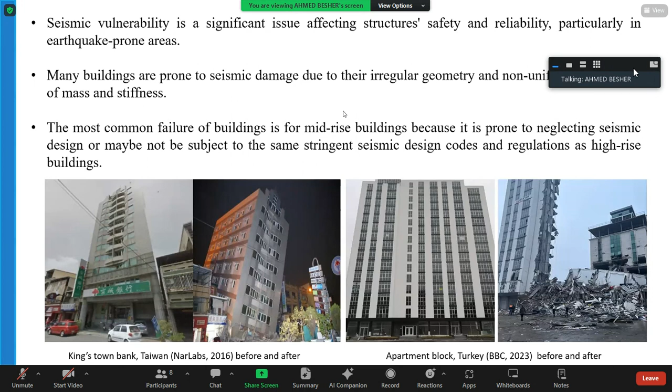First, the introduction is important to show what earthquakes can do, especially to irregular buildings and mid-rise buildings. Many buildings are prone to seismic damage because of irregularity in load distribution, mass, or stiffness. This is most common for mid-rise buildings, especially because they are prone to neglecting seismic design. Most designers, not in all countries, neglect seismic design, especially for mid-rise or short-rise buildings, which is why they suffer severely during earthquakes. So we need to pay more attention to mid-rise and short-rise buildings, especially irregular ones.

This is another part of the introduction. I wanted to talk about the retrofitting techniques, which can be used on unsafe buildings, or buildings found unsafe according to seismic codes. So I present here four types of retrofit.

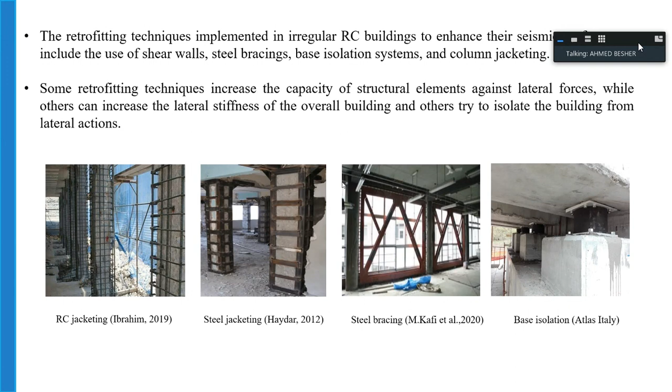The first type is RC jacketing, which is the most common technique in our countries. The second one is steel jacketing - they have the same concept, which is about increasing the stiffness of the elements themselves. The third technique is adding steel bracing to the building, which increases the stiffness of each structural member and the overall stiffness and seismic performance of the building. The last one is base isolation systems, which can enhance seismic performance and isolate the building during earthquakes.

The third part of my introduction is to show what we are going to do. First, I wanted to show the various damage states each building can suffer during or after an earthquake. We have five damage states that can happen after each earthquake.

The operational state means the building is still safe and still operating. The immediate occupancy state shows small damage related to non-structural elements. The third damage state is life safety, where cracks start to appear in the building. The last one is collapse prevention, where the building is already collapsed or already unsafe after the earthquake.

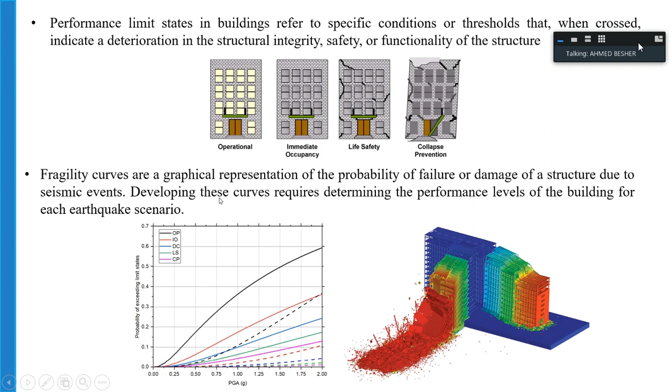The last thing in my introduction is to show what fragility curves mean. It's a graphical representation of the probability of failure or damage of a structure due to seismic events. If we have a structure under an earthquake or seismic event, it may suffer or show some performance afterward. We need to show the probability of failure or damage for our building under different damage states: operational, immediate occupancy, life safety, or collapse prevention. This is the purpose of using fragility curves, or fragility assessment.

The objectives for my research were divided into two main objectives. The first one is to evaluate the seismic performance of buildings with different retrofitting techniques.

We will use the nonlinear dynamic analysis to show the lateral displacement of the building before and after adding the retrofitting techniques, the maximum story drift, the story shears, and the mode shapes and time period for each model before and after adding retrofitting techniques.

The second main objective is to develop the vulnerability assessment and the fragility assessment, divided into two steps. First, develop the incremental dynamic curves and get the data from these curves to do the fragility assessment. So the objective of my research is first to study the seismic performance, and second to develop the fragility assessment.

Then I did a small literature review that shows how previous research talked about this point. All of this research showed that there is a significant improvement in the seismic performance of buildings after adding different retrofitting techniques. We can see the first one after adding bracing, the second discussed performance after adding steel jacketing, and the third after adding RC jacketing to the buildings. All of them showed a significant improvement.

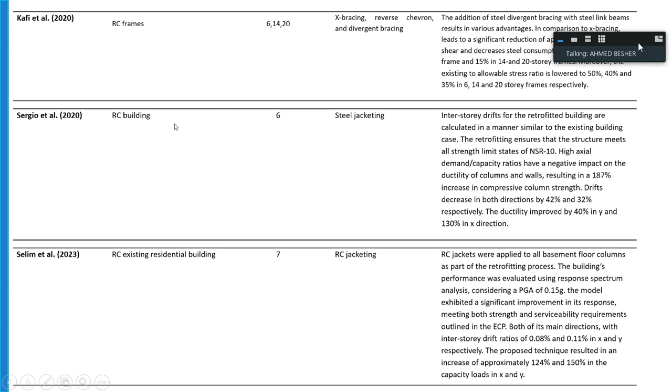That was a small literature review. After that, I did my methodology. First, we started to define the structural configuration of our buildings. We chose two types of irregularity in our buildings.

First one, building with horizontal irregularity. Second one, a building with vertical irregularity.

Then we determined the building vulnerability parameters. The first parameter is P1, which is about the irregularity - we'll change the irregularity. The second parameter is about the retrofitting techniques. So we have two buildings with two different types of irregularity, and we will apply two different types of retrofitting techniques on our buildings.

Then after that, we did a linear analysis, just a response spectrum analysis, to set the target response spectrum, and second, to design the building after adding the retrofitting techniques. After making sure that the building is safe...

We started our seismic events, our seismic scenarios, from a big database on the internet, which we can use to download many seismic events. So we used many seismic records from here and started to do our nonlinear dynamic analysis, after making sure that all elements are safe, to show the effect of retrofitting techniques on our building.

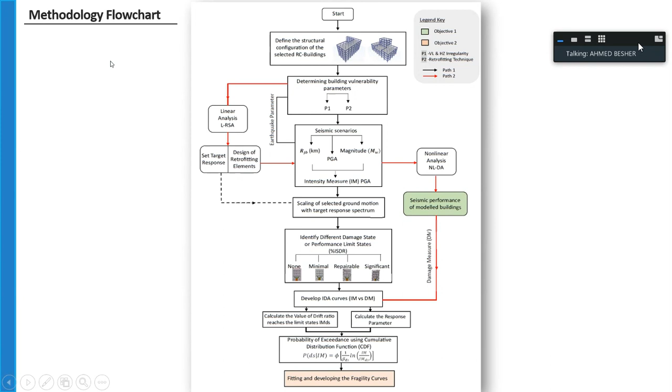The concrete grade is 30, rebar yield stress is 400. We have the beam size around the perimeter of the building. The importance factor is 1. We have the behavior factor for the first one is 3.2, and for the second one is 4 behavior factor, which we used in the code.

Ahmed-san, could you explain what kind of irregularity building 1 has?

First building was with vertical irregularity. We can see in the first 2 stories and first 2 levels there is a big opening in the middle of the slab. Then after that, there is no opening anymore.

After choosing the buildings, the regularity, and after choosing the retrofitting techniques for each one, we choose the seismic events that we will use in the nonlinear analysis.

I applied each seismic event in both directions, X and Y. Each seismic event on the PEER database has two seismograms in both directions, X and Y. So this is a 3D nonlinear analysis—I applied everything in both directions. The nonlinear analysis was on a 3D model in both directions.

According to the Eurocode, to consider the nonlinear analysis in the X direction, I have to add 30% of the seismic event in the Y direction during the analysis. I did the same for the Y direction, adding 30% of the seismic force in the X direction to the main force of the Y direction.

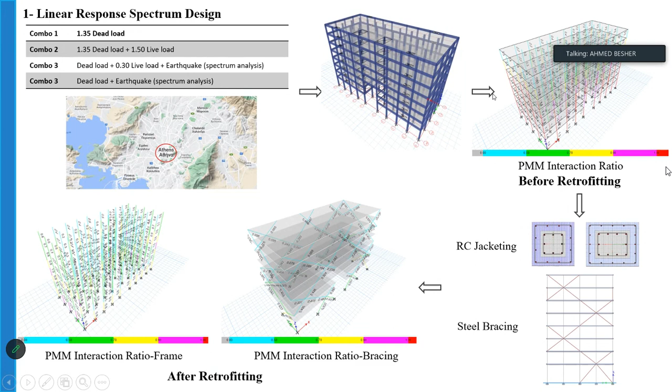The nonlinear analysis started with developing the incremental dynamic analysis. The first table shows the parameters of the incremental dynamic analysis. Number of intensities is 20.

The intensity label is the peak ground acceleration. The demand drift, we choose drift as the demand parameter, and the total performance level is 5.

As we can see in the second table, we followed this research, Xue 2008. We chose 5 ratings: damage control, life safety, collapse prevention, and IO. The maximum drift for each state is mentioned in this table: 0.5, 1, 1.5, 2, 2.5%.

So after applying the incremental analysis on the buildings, as we can see in this Excel sheet, we increase our ground motion intensity from 0 to 2G, and record the drift ratios for each ground motion intensity, for all cases: without retrofitting, with bracing, and with jacketing, for both buildings.

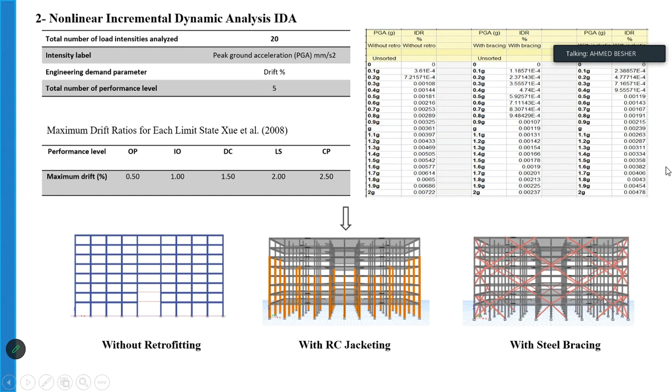We get the data from the incremental dynamic analysis as a first step, then we apply this data to the probability equation in an Excel sheet. Then we get the probability of each damage state happening under different motion intensities. So this was the last step of our methodology.

So this is the important part about the results. The first part of our results is about objective one, which shows the lateral displacement. The first two curves show the displacement in X and Y direction.

The red curve is without retrofitting. The blue one is with RC jacketing. The third one is the building with X steel bracing. We can see a significant improvement after adding the bracing, and also after adding the RC jacketing. Of course, the building is safe with both retrofitting techniques.

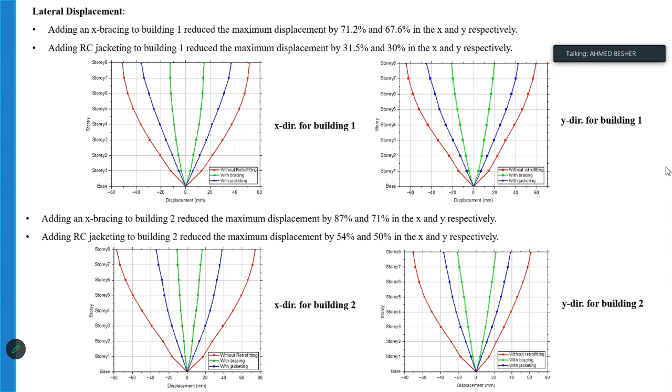You can see the bracing reduced the drift by 79% in the X direction, while the RC jacketing reduced the story drift by 48%, in building 2, in the X direction.

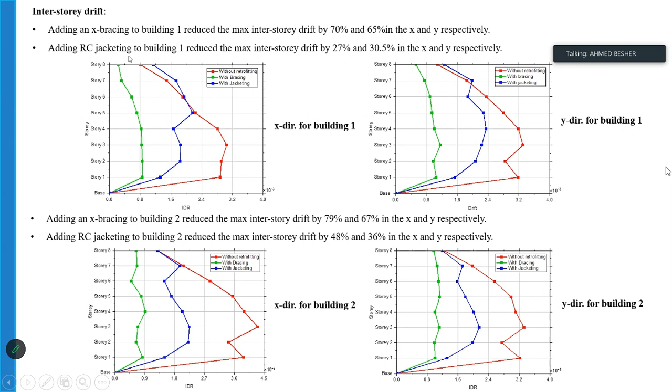The last point in the first objective covers the mode number, shape, and time period. For each mode number, the time period for the building without retrofitting is higher than the building with jacketing, and more so than the building with X bracing. The same happened for building 1. We can say the time period is reduced after adding bracing by around 52%, and after adding RC jacketing, it's reduced by 29%.

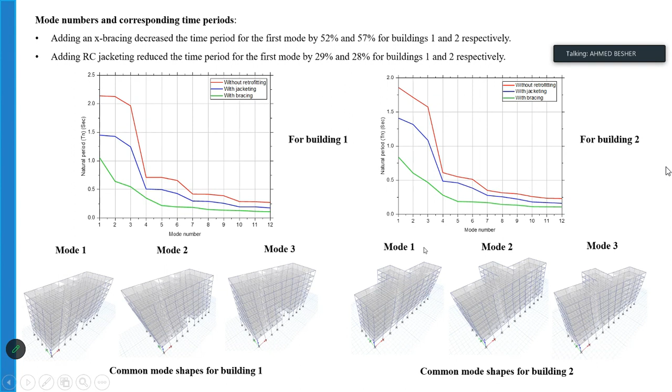The first point in objective number 2 is to perform the incremental dynamic analysis curve. This relation is between the ground intensity, 0.2G, 0.5G, 0.8G, up to 2G, and the corresponding IDR, the inter-story drift for each building. This table summarizes the data from these graphs.

As an example, to reach the operating state for the building without retrofitting, we need an intensity of 0.13G. The same building after adding bracing needs a higher intensity, and after adding RC jacketing it becomes a little higher, 0.2G. We can see improvement in performance after adding bracing and after adding RC jacketing, but of course adding bracing is more effective.

Building 1 and 2 show the same effect. Why is this line straight? Is the analysis non-linear? For my analysis it becomes linear - the IDA was a linear analysis. Not linear analysis exactly, but the result becomes like that. If you use the earthquake intensity on the vertical axis, you get more drift, so the curve should go gradually - why is it going straight? I don't know that, but I know some IDA curves show nonlinear behavior, sometimes showing distortions at some points, but this didn't happen with me.

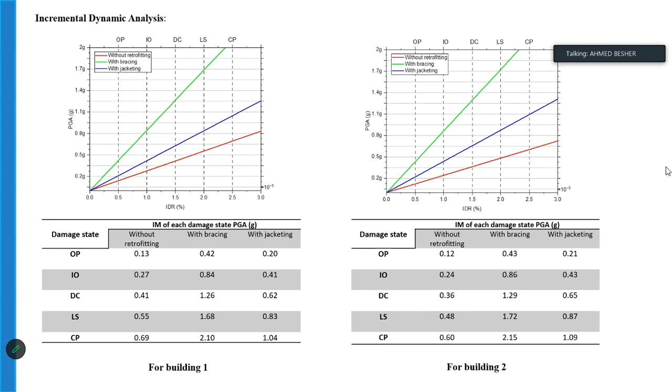Last point in the second objective is the fragility assessment. These are the fragility curves. The first plot shows the relation between the probability of reaching each damage state, with the horizontal axis being the peak ground acceleration intensity, showing the effect of bracing relative to the original building.

The second plot shows the effect of jacketing relative to the original building. We can see the probability of the damage state becomes lower after adding the bracing.

The black curve is operating state, the green curves are life safety, and the purple one is collapse prevention. Each curve shows a different damage state. The dashed line is after applying the retrofitting techniques, while the solid line is the building without any retrofitting.

So we can see that the probability of reaching the damage state becomes lower after applying the bracing, for the first plot. In the second, we see the same: after adding the jacketing, the probability of reaching the damage state becomes lower, but not with the same effect.

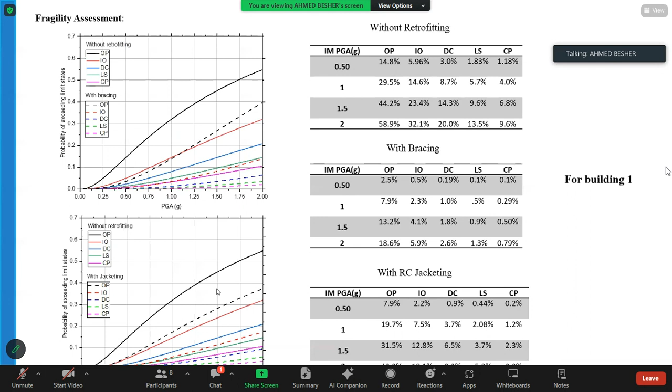So for interstory drift, it was observed that the building with RC jacketing was showing less drift than the bracing. If you can go back to the nonlinear analysis... sure. This is the drift? Yes.

No, okay, that I mistook. It's okay, I confused the green and blue lines. The green line is the bracing, and the blue is the jacketing.

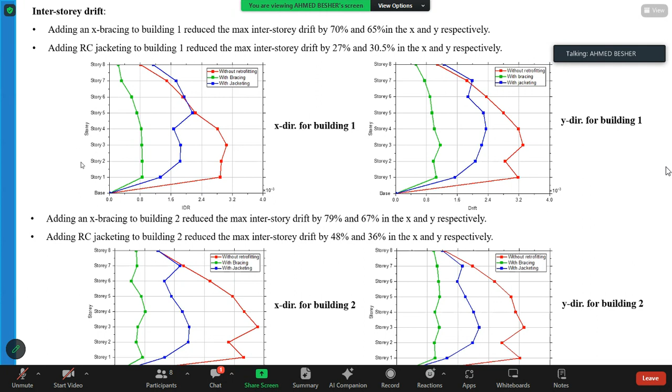Yes, in all cases, the steel bracing shows the highest improvement, in the displacement and the fragility results and the incremental dynamic results. We can say that the steel bracing showed the highest improvement, but there is another point I will talk about in the conclusion.

I can say that the bracing is more effective than RC jacketing, but we didn't, this point of research is only about the structural performance. The research didn't include anything related to economical issues or construction issues. Adding steel bracing, I think, will be more expensive than adding RC jacketing.

We can say it can cause a higher improvement relative to the RC jacketing, but we need to consider the economical issues of that. Of course, it will cost a lot of money.

Also, how much it's easy to construct the steel bracing in the building relative to the RC jacketing? Maybe it's not that easy. Maybe there are some architectural issues to adding the steel bracing in the building. So this research only considers the structural performance for all buildings, but it didn't consider any economical issues, any construction or architectural issues. That was a kind of recommendation for further researchers.

Okay, so first of all we start with the coupling wall with steel beam, and then we run a check with capacity spectrum. And then we have a few design criteria we want to look at: first of all story drift, then wall ductility and beam ductility, and also degree of coupling. If the model passes, it doesn't need to apply a damper, but if not, we try to apply a damper - metallic, viscoelastic, and also hybrid damper. And after we apply it, we'll use the displacement-based design method to get the successful design.

Sensei, do I have to explain to Ahmad about the system now or later? Maybe later, we don't have much time today.

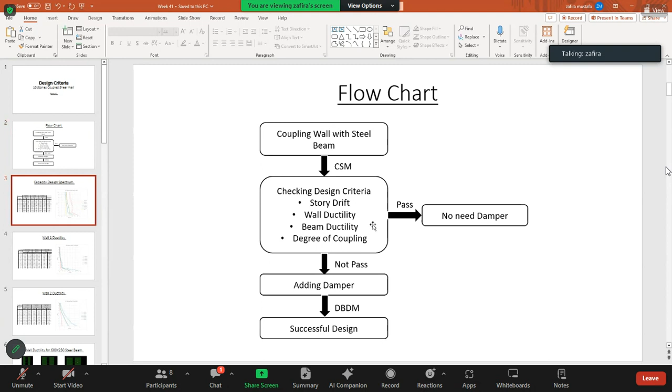So we start with two different steel beams. One is 600 times 250, and another one is 750 times 350.

This is the interstory drift by capacity design spectrum. The blue line is for 7.5 meter wall, the green one is for 5 meter, and the red color is for 2.5 meter wall. The limit we saw is 1.28 centimeter, which is 1/250 story drift.

So as we can see, the story drift based on capacity design spectrum exceeds the limit. After that, I checked the wall ductility. At the bottom wall, especially for the 7.5-meter wall, the ductility is very big. Also ductility for wall number 2 is also big, almost 18 and 16.

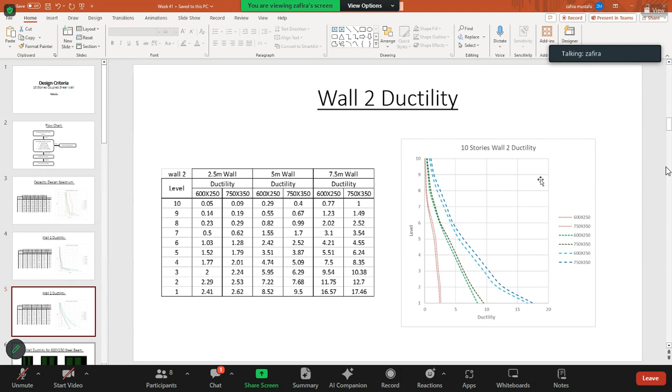And so, could you stop? Hi.

So actually the 7.5 meter is definitely stronger, and the 2.5 is weaker. But the damage is higher for the 7.5 meter. Why?

In this model, sensei, the thickness of the wall is the same throughout, so when the length of the wall increases, the width of the wall also increases. Probably because of the width increase, it has more compression loading to the wall, excessive loading to the wall. That's why it's possible to have damage on the wall.

How about the story weight? Story weight is maintained the same. Same way, yes.

I think, for example, how much is the natural period of the 2.5 meter? Natural period, T, I will open it. So for 10 story, 2.5 meter, this is the content. Natural period - so we can take 100%, so it's about 0.6.

And how much for 5 meter and 7? 5 meter is 0.4, and 7.5 is about 0.3.

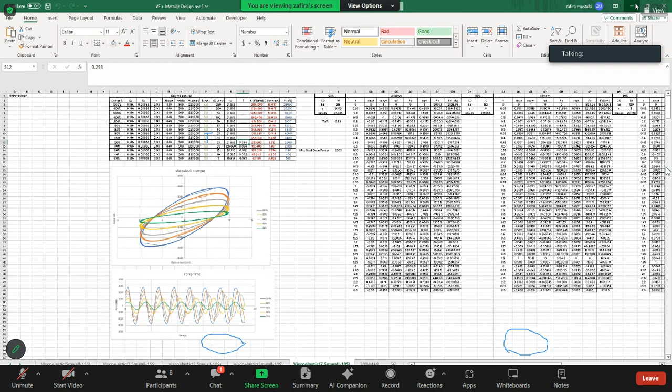Oh okay, could you go back to the slide? Okay, so...

Okay, yeah, so if we plot the curve - probably this is 2.5, this is 5 meter, and probably this is 7, 7.5 meters. So strength is higher, right? And this is SA, SD.

And... when you draw the demand curve, I mean the earthquake curve... I cannot change the color. I don't know.

So you apply the capacity spectrum method. Yes sensei, so you have a capacity curve and a demand curve. Yes, could you show me what the curve is?

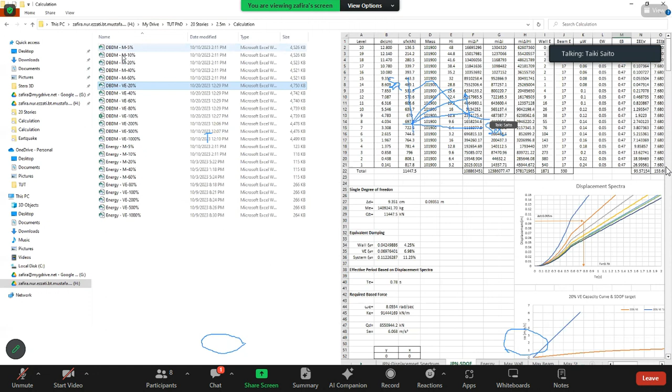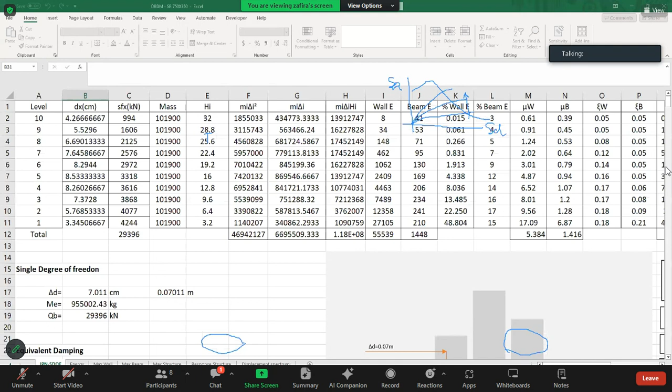So this line is a capacity curve of this building. Right, so this is which one? This is 5 meters? This is 5 meters, sensei, 5 meters.

And the ductility is from something less than 2. Okay, could you show me 7.5 meter on the same curve? Okay.

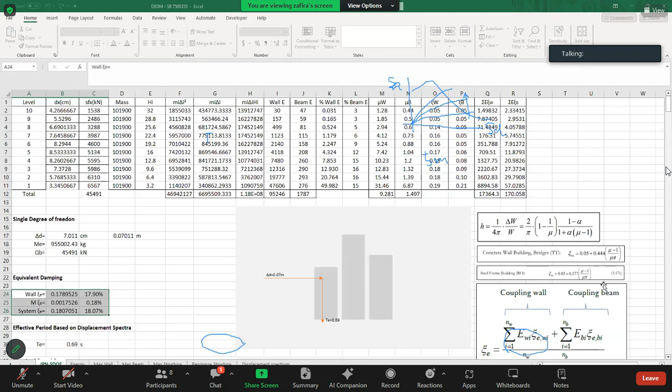Okay, it's much higher. And the capacity performance point is where? This point? This one? No, the performance point is the orange color intersection with this dotted line. Yeah, okay, so this one, a bit up here.

So, how to say - if you draw the capacity curve together, this is 7.5 meter. And 5 meter probably something lower. And the ductility line also - 2.5 is also.

But you assume the same story drift like a yielding point, right? Yielding point is 1/250 maybe. Yeah.

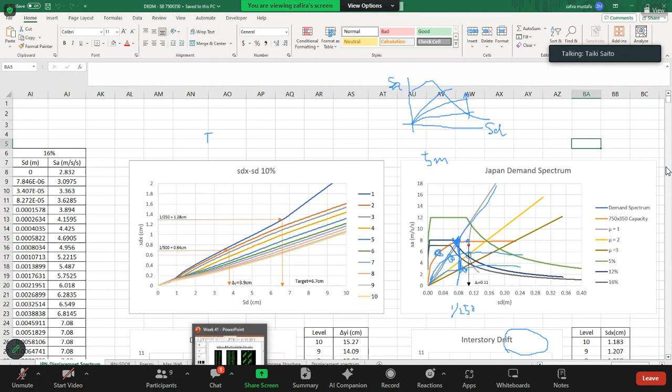And then after that, I also checked the coupling beam ductility. Most of the ductility of the beam is less than 5. And then I also checked the degree of coupling, and I made a checking table. Should I clear the...

Okay. Above is the small beam, and the bottom one is the big beam.

So we can see here the limit drift is more than 1.2. And then the ductility of the wall, for 5 meter and 7.5, doesn't fit with the criteria that we're looking for, and doesn't fit with the coupling beam ductility, and also the degree of coupling only for 7.5 is too big.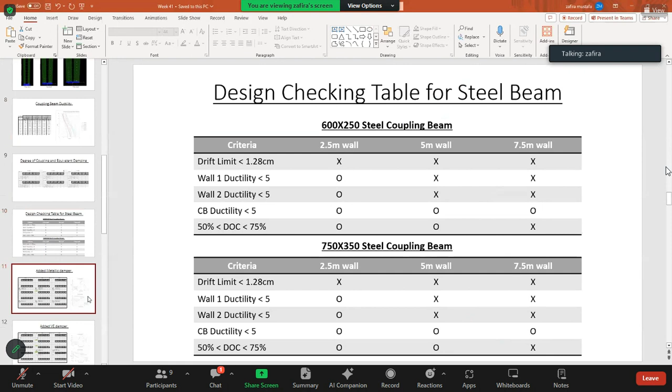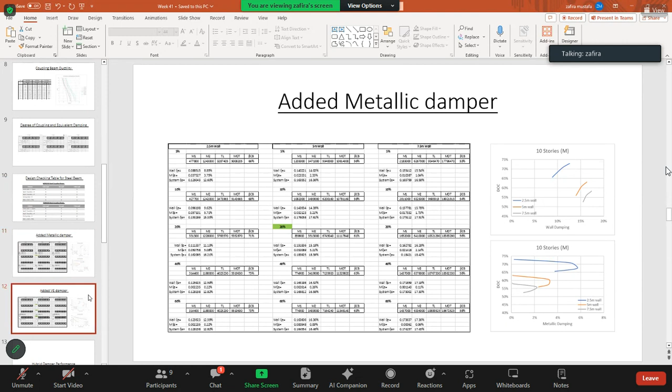And then after that, to check how much improvement we can do with metallic damper and viscoelastic. As we know, metallic damper only less than 30%. So I took 20% for metallic damper, and then viscoelastic.

I also ran displacement-based design, but I only show the result here to keep it simple. So the good performance for the 5 meter wall is around 40% to 80%. And then from here, we make a combination between 80% to 40% with 20% metallic damper.

See here, from 80%, this is the performance curve, capacity curve, and the target performance. This is like over design, so we can reduce more viscoelastic capacity. So we get here, and then 40% is perfectly matched with the capacity.

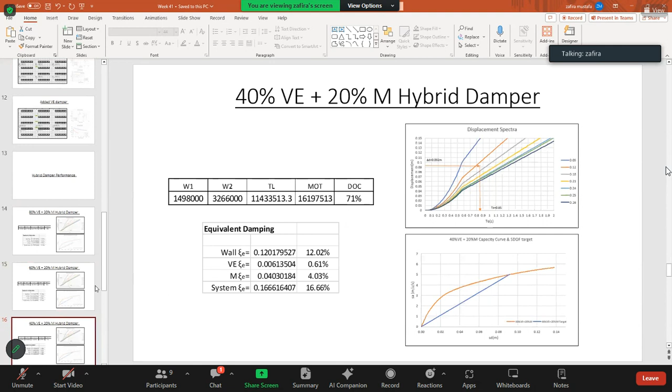And then we check the ductility. Actually, the ductility of the wall is reducing. And I also checked with Stera 3D.

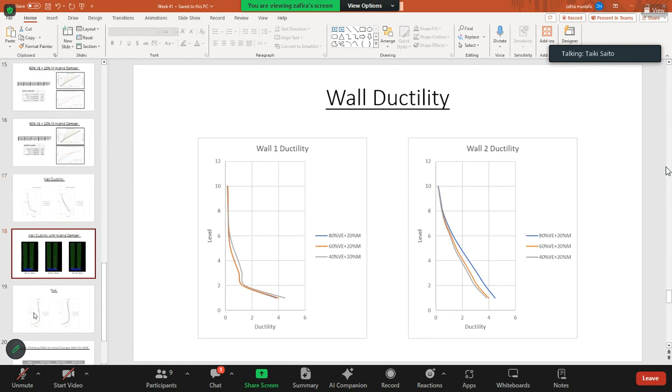After that, I checked with time history analysis, story drift 1.28 centimeters. And then I made another check for the performance after we put in this hybrid damper. Satisfied, after we put the damper.

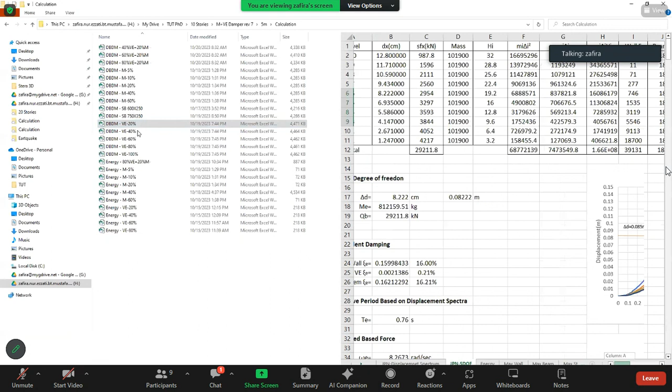Can you see my screen, Sensei? So this is 20%, and this is 60% viscoelastic damper. Only viscoelastic, well, it looks okay.

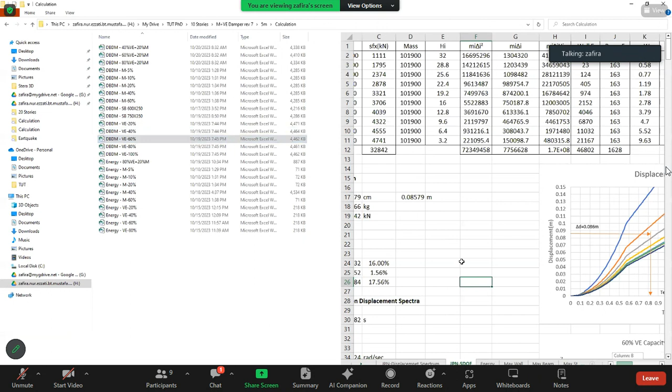Yeah, it looks okay. But the purpose that we put metallic is to handle excessive earthquake. If, for example, a larger earthquake comes in that situation, the metallic damper actually becomes like a fuse to the damper. So that's the idea for the hybrid damper.

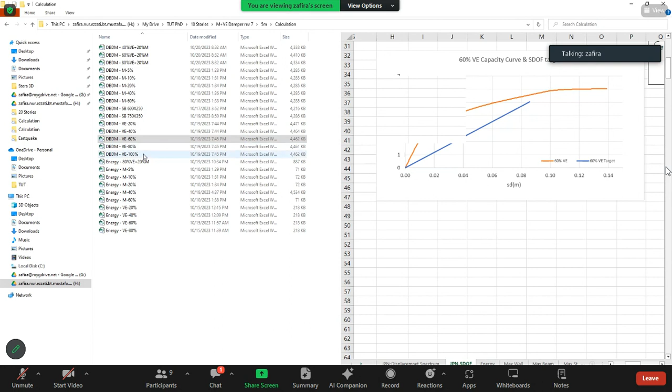So if you adapt the hybrid damper, actually the metallic damper acts like a fuse. Yes, that's the original idea that we propose.

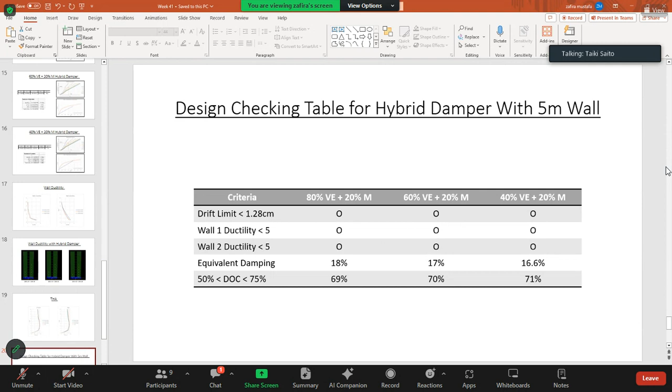Did you check the hysteresis of the coupling beam? Metallic damper is yielding. Sure.

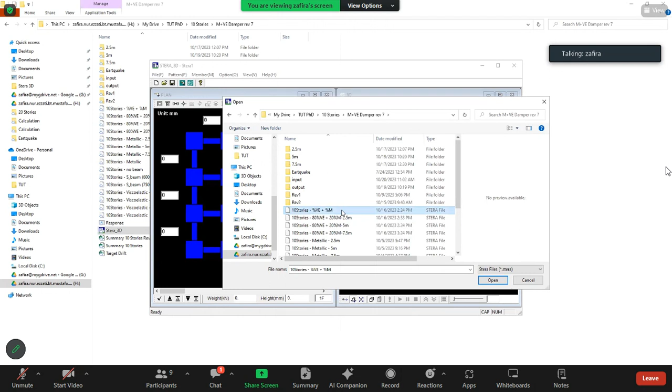The metallic damper starts to yield less than the top. So for example, this is the 5th story, and this is the metallic, and this is the viscoelastic damper. Let me check.

So this is 80% viscoelastic. Okay, and then.

Oh, okay. Oh, okay. Oh, looks good. Okay. Yeah.

Okay, I will explain for other people about the meaning of this damper.

So if we put only viscoelastic damper, damping force may exceed much, and it may damage members or connections. So we want to somehow limit the upper and lower damping force of the viscoelastic damper. That's why this element has a metallic damper at both ends and a viscoelastic damper in the middle.

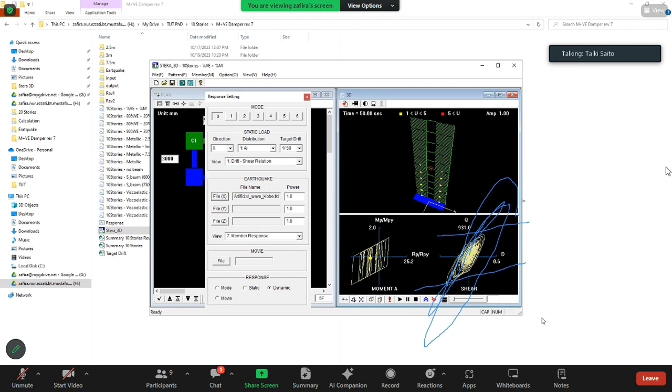And metallic damper again. So this is a model of the coupling beam. If this viscoelastic damper's shear force exceeds the limit, this metallic damper starts to yield to limit the damping. So both dampers are working simultaneously.

Okay, so this is what other people want to see. So we can see the hybrid damper here, whether this damper is okay or not. This is the only damper we know of.

This is one idea, but we must always be careful about patents. If, for example, we ask the Sumitomo Riko company to produce this metallic damper, maybe we must think about our own original metallic damper. This is just one example.

Another type is from a doctoral thesis we read. There's some, I forgot, a fuse sensor, a steel fuse at the end.

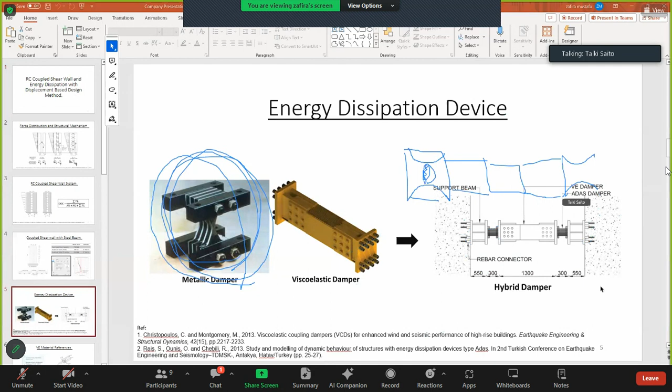The section is like this, they somehow taper the section, so they expect yielding here, connecting to the viscoelastic damper, and another tapering here, Sensei. They expect to yield here as well, so the tapering is here and here.

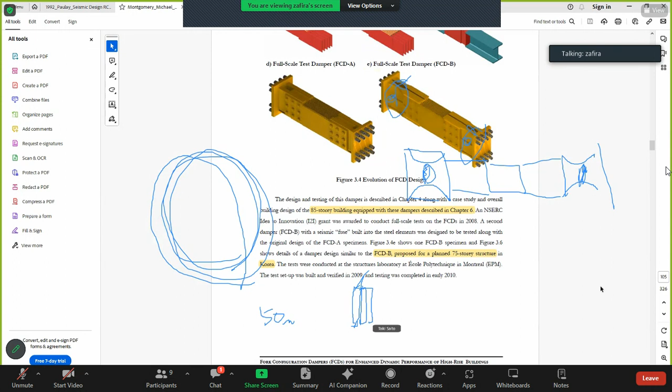Sensei, actually if we look at the layer, how can I say - between one layer of viscoelastic material, the plate displaces in 2 different directions. So you are right, we can increase force but we cannot increase deformation, the displacement. Also in the Sumitomo Riko catalog they mentioned that.

No, but how to... spend? Maybe. So I don't know - 5 millimeter viscoelastic layers separated by steel plate, so you can say total 15 millimeter thickness might be possible.

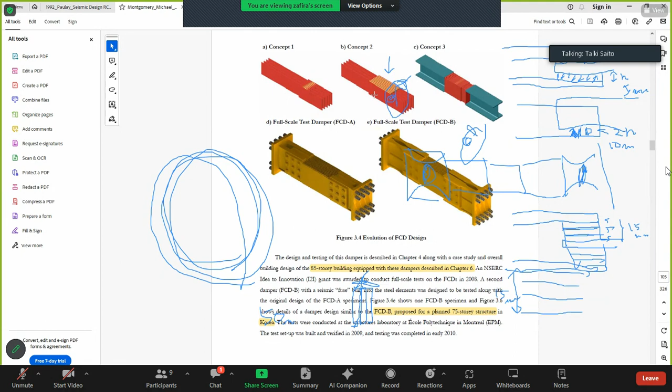Okay, good. So we must discuss more about the capacity spectrum method and displacement-based design method.

Sensei, we can discuss the available time later, for the meeting, one by one. Yes please, face-to-face meeting. When are you available? Maybe next week, let's see. How about Monday, 11 o'clock? Monday 23rd, I'm okay sensei. 11 o'clock, okay? Okay, yeah.

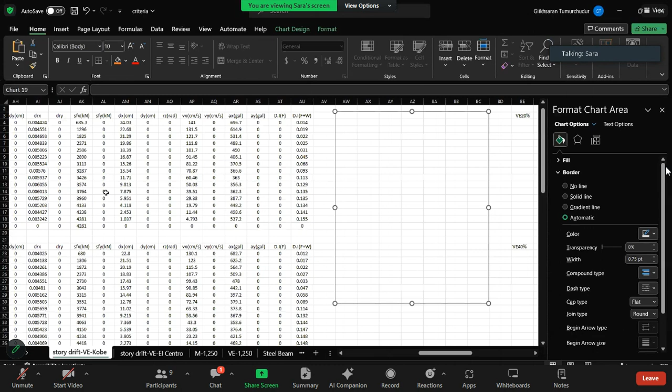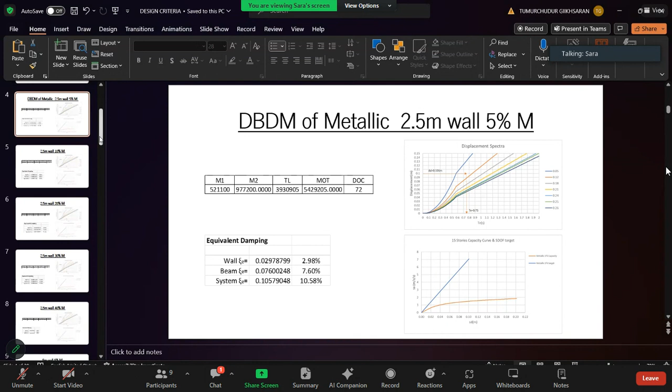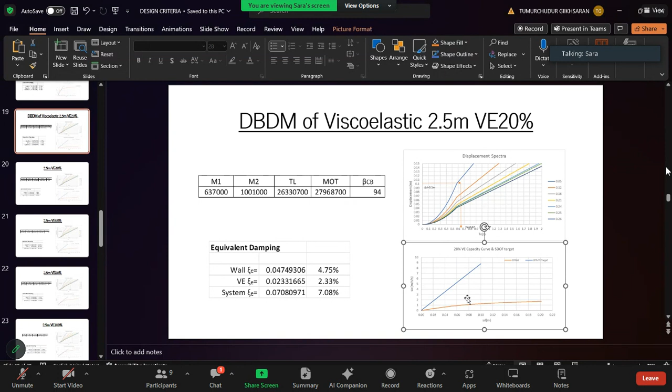After that, this is the metallic DBDM's result. Before the meeting I showed it, but now I want to show the viscoelastic dampers, 2.5 meters. All designs of them are not good because this target line is over the capacity curve. So I want to show the 5 meters from the 5 meters.

So Sarah-san, could you go back to the story drift again? I mean, could you go back to this one? So all story drift is less than the target, 1/150. I have a question - why is the story drift less than the limit?

Because the story I showed is 10 story, this is 15 story. It should be more than the limit. I don't know, maybe the natural period is longer. So if you increase the number of stories to 15, the natural period is longer, so the earthquake effect is not so much. That is why the response is smaller. Maybe.

I will check the exact reason later, sensei. Sorry, I have a phone call. Okay. Can I... turn? Okay.

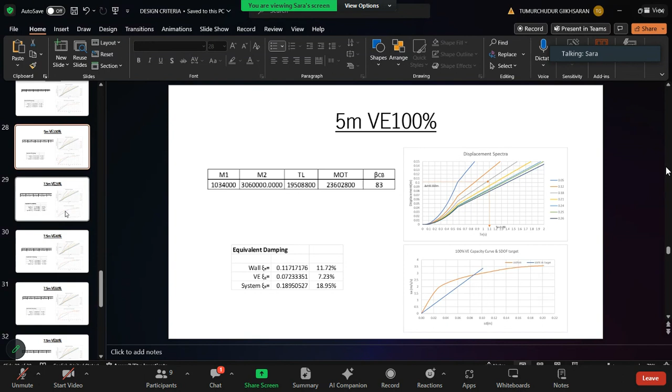Okay, viscoelastic 100%, this is just a little bit over the capacity curve. This is the target line. And this is a 7.5 meter wall with viscoelastic 20%, and this is a perfect result. And increasing the properties.

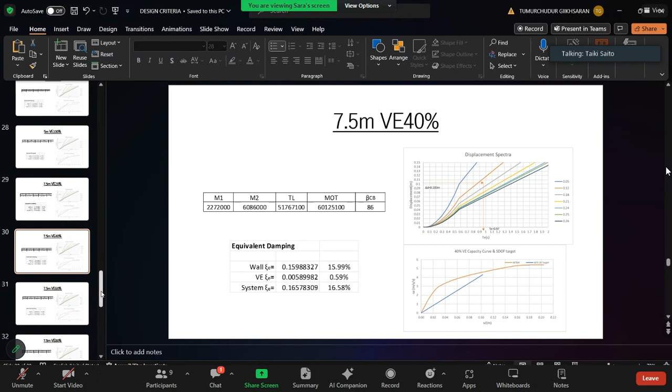This is the result after the 40%. And I want to show this, under the 5 meter and the 7.5 meter story drift. But the story drift you showed before is much smaller than this one.

Yes, now why? Why after you put the damper, is the response larger? Why? Safira-san, why? I have the same question, Sensei. That's why I asked her, like, why the limit is less than... Yeah, maybe I will check. I will try to check, I will check her CSM later, Sensei. Okay.

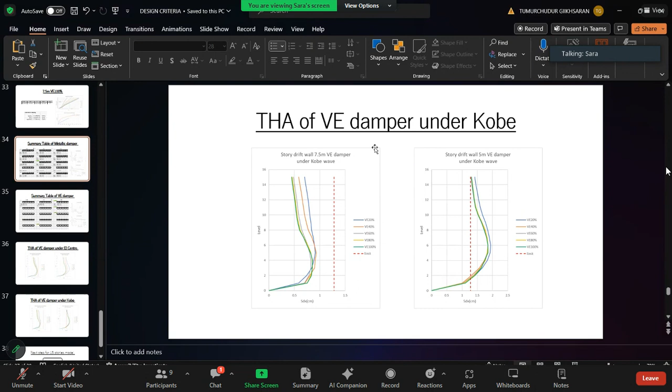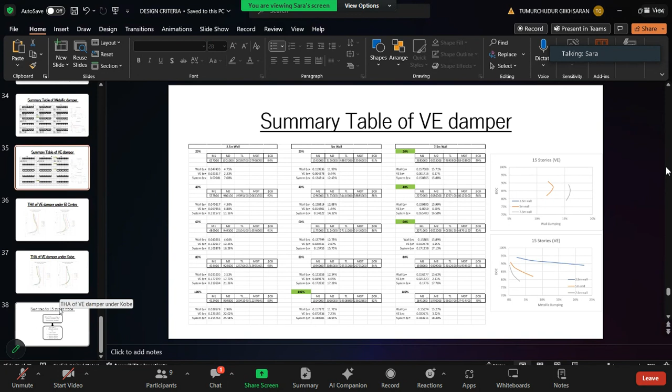And this is under the... okay, and a summary table of the metal damper. Choose the 20% from the viscoelastic damper, and the best variation of the dampers: 7.5 meter walls at 20%, 40%, 60%, and the 5 meter walls at 100%. And the next step is to check the combination of this one.

Okay, so 100%, please talk with... yeah, and check maybe the capacity result again. Spectrum? Yeah, capacity spectrum. No, I don't.

So anyway, if the building without a damper doesn't satisfy the criteria, then we put the damper to somehow retrofit it, right? We replace the steel beam with a beam with a damper to improve performance. But it looks like your building is okay from the beginning, and after putting the damper, the response is even larger than before. So something is wrong there. It's better to check. Okay.

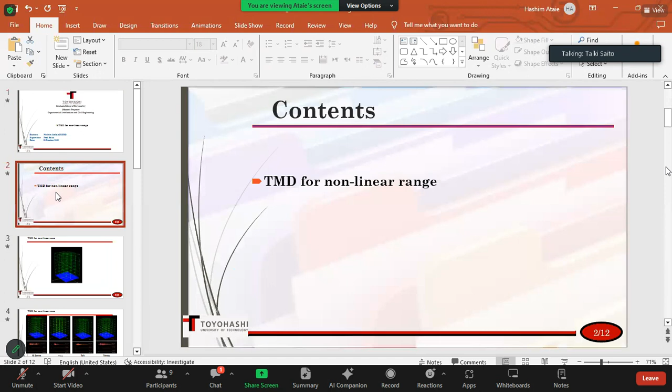I modeled this 7-story frame building and analyzed it under 4 earthquakes. Under Kobe, there is damage to the building at 2 connection points, and on the left there's not too much yielding.

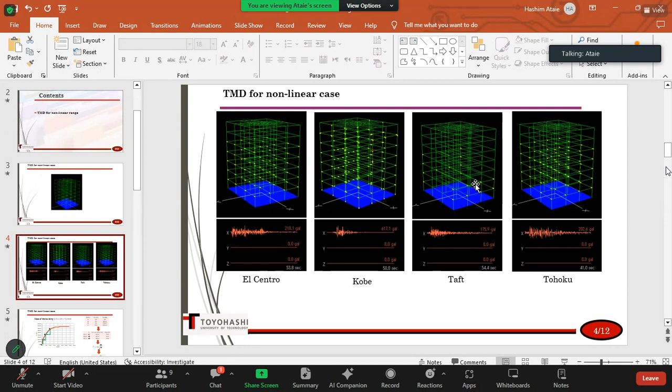So I applied, for TMD, first a single TMD tuned with this time period, then 2 TMD with these 2 time periods, and 3 of them, and 4 TMD with... okay. And these are the values of stiffness and damping coefficient of the dampers for single TMD, 2, 3, and 4 TMDs.

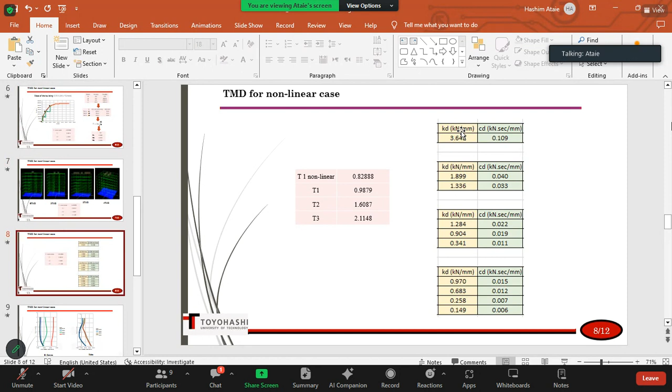The result under Taft is because the maximum displacement of the top story is about 7.4 centimeters, so we dedicated a TMD which exceeds that. Under Taft, maybe because of that, the mass we dedicated in this part doesn't work well.

So totally, we can say that this methodology works very well, I think. But could you tell me how you calculated the displacement reduction percentage? The formula. Why can it be negative?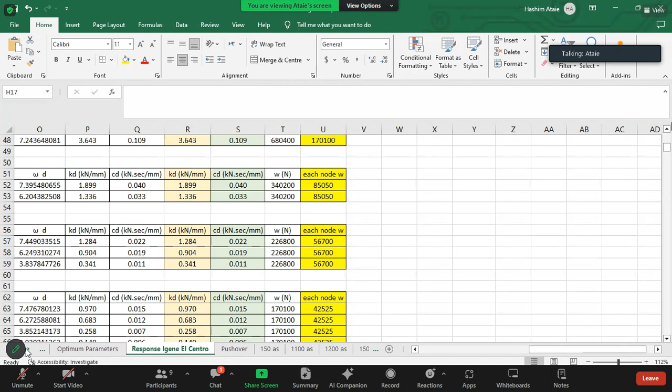So the reduction percentage is: original story drift minus story drift with TMD, divided by the original story drift, divided again by displacement without TMD, then multiplied by 100.

For example, it's negative if deformation or displacement increases after putting the TMD. This part is negative.

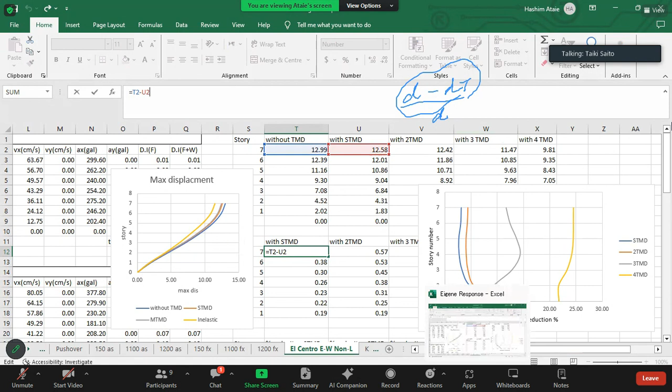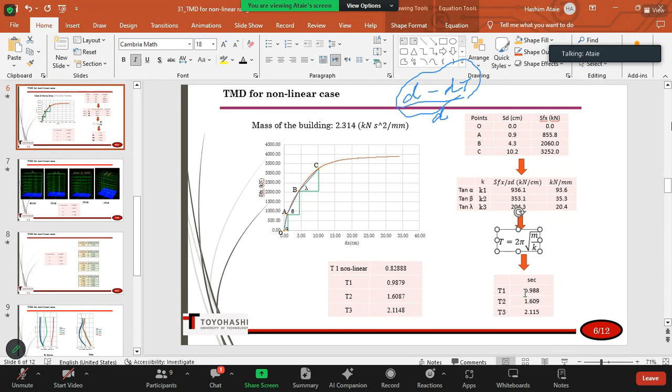For this model, that's all, but I'm thinking about something else. Since the mass here is the total mass of the building, these values are obtained. But if I use the effective mass ratio instead of this mass, then T will be very similar to the natural period, and the periods will change, and I can apply only 3 TMDs.

For this T and natural period, it would be the same, so we don't need to use 2 TMD.

Previous research for mid-rise or low-rise buildings, like 7-story, showed we don't need to control the higher modes—only the first mode is enough.

But I want to model a 25-story building. This 3 TMD setup is for the first mode, and I want to design 2 other TMDs for the second and third mode also, and see what the results would be.

Okay. Well, that is interesting. Yeah.

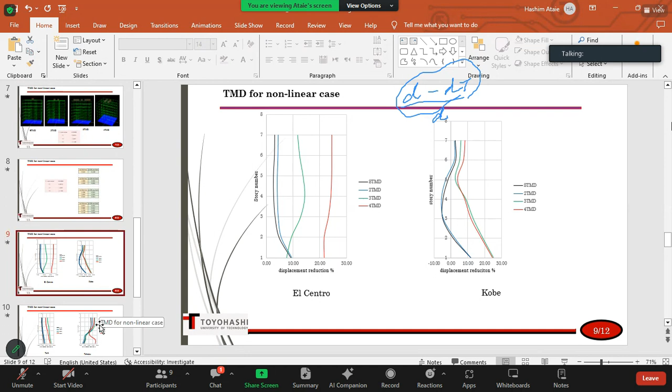In the middle there's a design problem, because for the first, second, third, and fourth story we have strong columns, but the dimensions and rebars of the fifth, sixth, and seventh story are different. Because of that, the building is soft in the middle, so the displacement is higher, and this percentage line looks like this.

Okay, yes, that's all I wanted to check and explain, Sensei.

Any question from students? No question.

Ataie-san, I must also discuss your job hunting. But maybe we must discuss face to face, right? Okay, Sensei, yes.

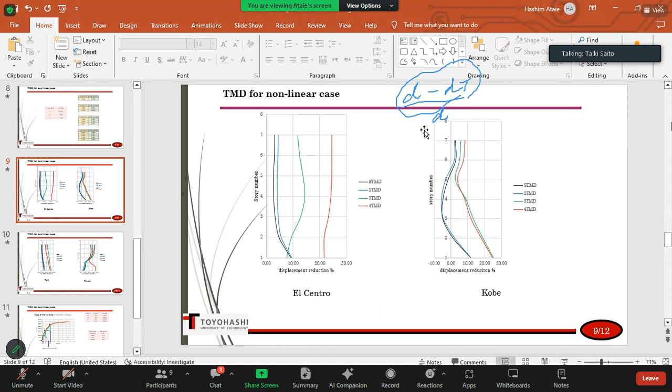I am a little bit worried about your job hunting. It's not so easy to find a job in Japan. Yeah. The language is not good, it's difficult.

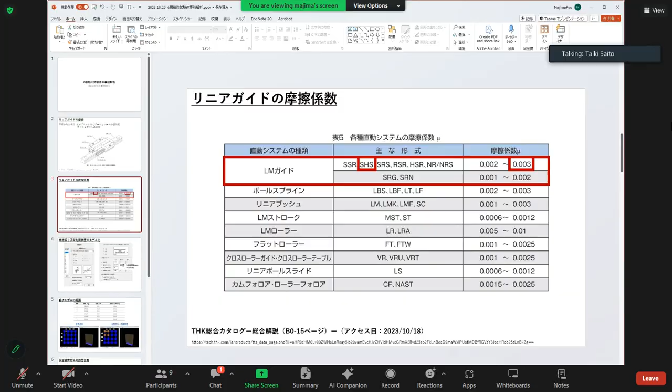So that's all for today.

Saraya-san, do you have anything? No Sensei, I have prepared the presentation, I'll present. Okay, yeah.

Sensei, I will make the corrections as you suggested, and send to Vasant Sensei by today. Okay, and maybe next week we can submit to Soil Dynamics. I don't know if Soil Dynamics is the best journal, but it was quick for review. Yes Sensei, and the impact is good for Soil Dynamics. Okay, and I will also ask Vasant Sensei if he has any recommendation.

Okay, so next week Saraya-san's presentation is Tuesday 24th, and you will leave Japan on the 30th. Yes Sensei, leave Toyohashi on the 30th. Okay, maybe we can have lunch on the 25th or 26th. Okay Sensei.